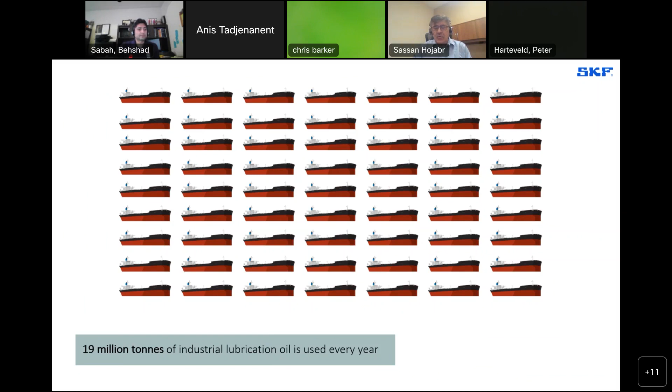However, the way people have looked at traditional lubrication and industrial lubricants in particular, we want to change the mindset and look at this oil as an asset as opposed to a disposable commodity.

I'm showing here, for example, a typical oil cycle, starting from the original state at the higher oil quality, and then it goes to whatever process it is, and then it degrades over time, and then the oil basically is being disposed of into new oil, and then we do this multiple disposal and use in the system.

But a couple of issues with that. One is that obviously we are in the era where everybody is looking for sustainability. As you know, COP27 is ongoing, and everybody is trying to find a way to contribute in any measures that they can. So this is obviously not a sustainable way of doing this.

The other thing is the quality of the oil as it degrades is also going to change the performance of the processing equipment that you use that lubricant for. And so obviously there's a cost involved with all that. So ideally, one wants to be able to continuously use the oil in this original state, if possible.

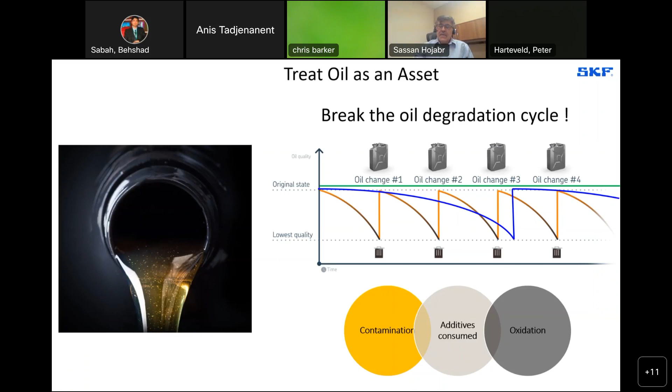All right, so what SKF has done over the past number of years is look at this technology called DST, or double separation technology. This is a company that we actually acquired a number of years ago, as I mentioned, and this is an oil reconditioning unit that runs in its SKF factory.

As you see, it's a fairly large piece of equipment, and this is installed in a very large oil reservoir. And here it's showing that for every cubic meter of oil that is being regenerated, there is over 3 tons of CO2 being conserved.

And we have, as I said, a number of these in our facilities, both this large one, and then we have the smaller version called small integrated, as well as what's called the standalone system, which can be operated at the side, and you can bring the oil and recondition there.

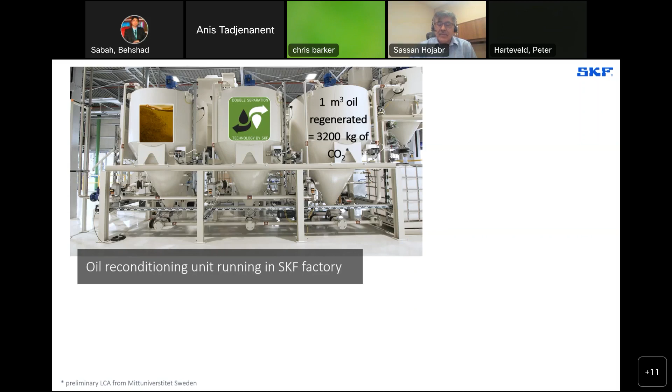We were also very excited to essentially launch a compact version of this, which we call RecondOil box. I'm going to go through some of the mechanics, but basically the idea was to bring that technology into a compact form that can be adopted by customers for many operations.

And it comes in many different forms, but this actually has even higher equivalency of CO2 reduction per cubic meter of oil that is run through this unit.

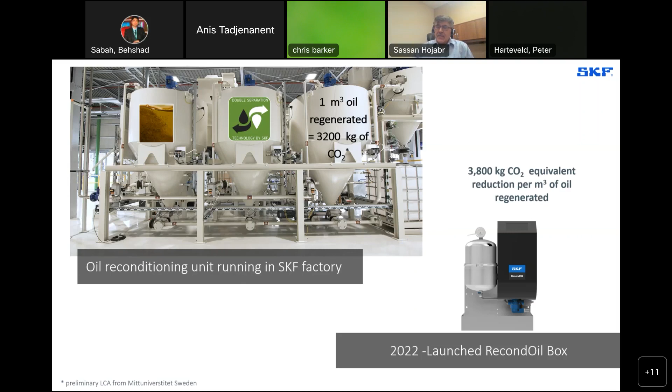So again, the potential areas of this circular use of oil, or extended use of oil, would be total cost and oil cost reduction. That's very obvious to everyone, especially with this increased cost of lubrication, and everybody suffers from that, as we all know.

Performance improvement, as I said, if the machinery can run with a lubricant which is as close as new, then it's going to perform much better in whatever application, being hydraulics or otherwise. And this sustainability angle and the reduced emissions can contribute, even though small, to each company's target goals in terms of sustainability.

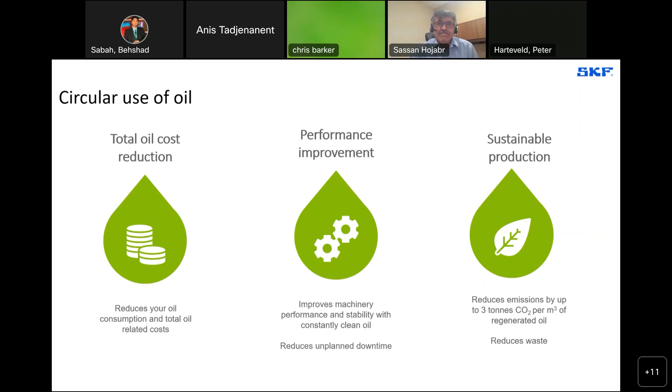So let's move into what we have for the talk today in terms of content. I'm going to talk more about describing what the RecondOil and this double separation technology consists of.

And then we're going to look at the tribological verifications of that, because we have to make sure that the oil treated this way has no negative impact, and hopefully positively affects what we see in terms of friction, wear, and other aspects.

And then we'll give you some examples that have been done in the facility I mentioned in Netherlands by Arnaud, and then we're going to look ahead at some of the things we have already done and some things that are ongoing and coming as we go through the remainder of this year and forward. As I mentioned, we have another talk planned for the next STLE.

Okay, so let's focus on this reconditioned oil, the double separation technology, and explain a bit more for those who are not familiar with the concept.

So this is called double separation technology because it has two combinations of a chemical and mechanical process. What we have here is a patented technology, which we call a chemical booster, for lack of a better description.

This is added to the oil. It's very attractive to many of the contaminants that are present in the oil. But the first thing we have to do is mix this booster with the oil.

So there is a process of mixing this in, and a lot of the technology we have is around proper droplet size, and all that has to be done properly. Once that's done, then the next step is that, once it's mixed in, it's going to start attracting all the contaminants within the oil.

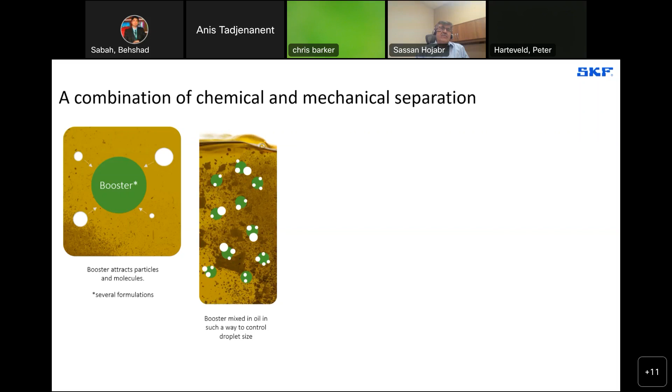These contaminants come in different sizes, and once they agglomerate onto these particles, attracted to them, the whole system starts agglomerating, and you get these bigger booster droplets coalescing together with the contaminants. Then you can settle or separate them in different ways.

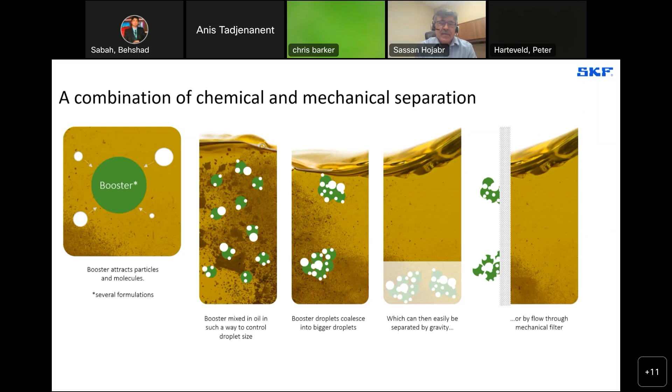And you would have this top phase, which has a very low contaminant level, and that's still going to go through a separate filtration to remove the last remaining contaminants. But what I'm showing in this last part is also the RecondOil box technology, in which we included this booster and impregnated the filter, so we can achieve this double separation technology with a filtration system, which is very convenient in that sense.

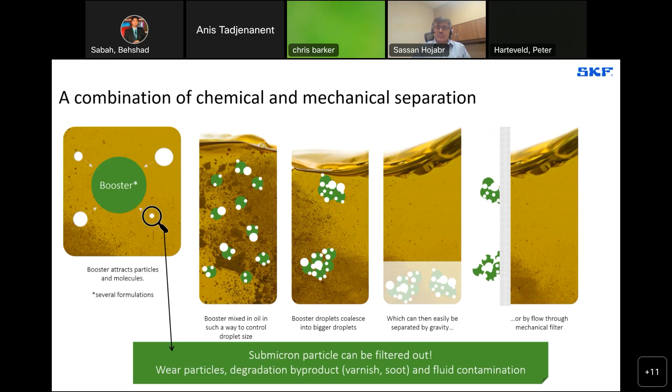In terms of the type of particles that we can remove, they could be from anything: wear particles that come from the process, like iron or other metal particles, degradation products that come from the oil itself, which demonstrate themselves in terms of varnish or soot, and fluid contaminations like water and others, which are all very attracted to this booster because of its chemical composition.

One thing we wanted to emphasize in terms of the effectiveness of this system versus other potential systems is that it can go into really submicron and nano particle removal from the oil. There's a statistical distribution of particles within any system, and in oil as well, where 80% of the particles would be in the submicron region. The issue with that is, in terms of the surface to volume ratio, there's much more surface area for these nanoparticles and submicron particles, even though they're small.

Chemistry, as you know, is really driven by the surface, and so when you have a lot of surface area from these contaminants within the oil system, that can really degrade the oil at a much accelerated rate. That's where we like to bring the benefits of DST, which can really tackle that and remove them from the oil.

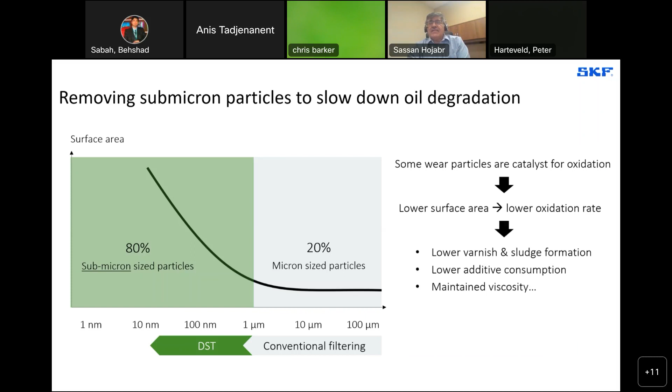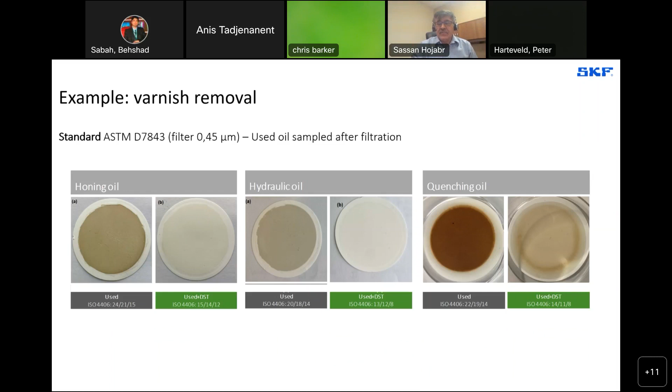But interestingly, since we're talking about nanoparticles and also these soluble varnishes, the patch size is 0.45 microns. So anything smaller than that, you would not see in a typical patch test, the standard ASTM test.

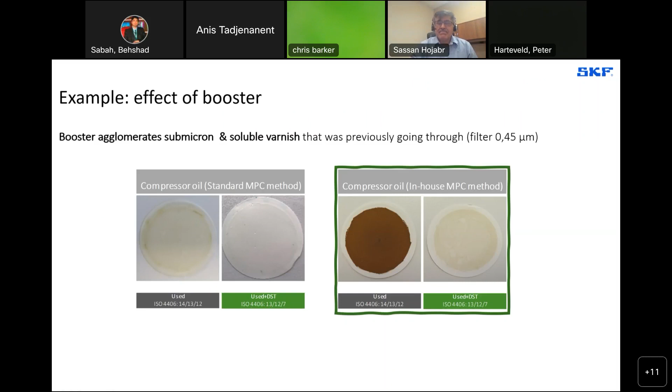Another study that was done looked at what effect DST has on the thermal stability of the oil. This is a good study done on a high viscosity 320 centistoke oil, and we deliberately added submicron iron oxide particles to the system.

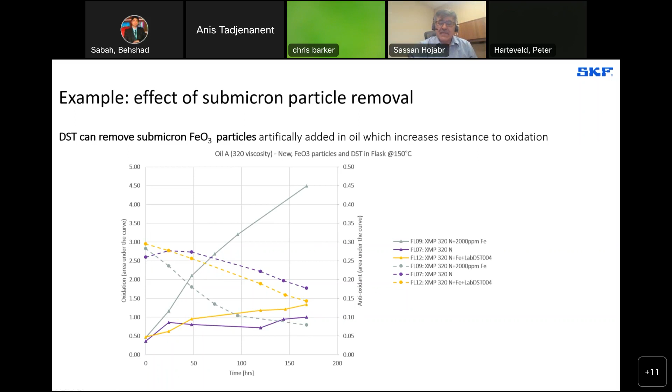But when this oil was treated before going to the aging, with the DST process, the picture changes. This yellow shows that we actually pretty much bring it back to the state of what the new oil was, both in terms of thermal stability and in terms of oxidation or antioxidant level. So again, it demonstrates that these submicron particles can be treated in the oil with this DST process, and removal of them would help the health of the oil.

All right, so let's now move into the tribology part of the discussion, because this is the forum that is for it, and it's very important that once we do this treatment, that we are not negatively affecting the performance of the oil, because at the end of the day those properties are good only if the oil can perform in the real application.

Areas that we have been focusing on in terms of this DST technology: metalworking is one of them, as I mentioned, used in our own plants, and I'll have examples of that again. We also have SKF making a lot of bearings and things like honing that can use this technology. Hydraulics is another focus of ours in terms of oil systems.

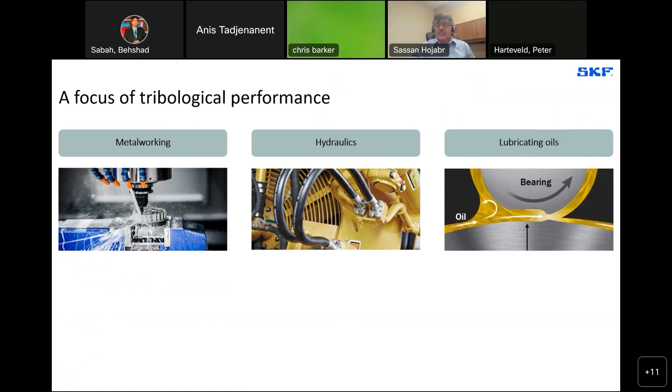For hydraulics, maybe particle count is not as much of an issue, rather the varnish can be very detrimental to the health of machines like injection molding and others. And the one that is obviously very close to SKF's heart is lubricating oil and its use in bearings and so forth. That's where we're working, getting more data, and we have examples in this talk. We're doing more work to get the data we need to show the performance there. So that's kind of our challenge as we go forward.

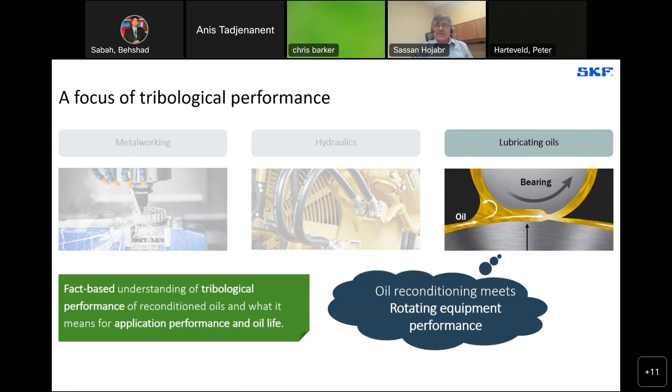All right, so let's move to setting up how we do this tribology verification.

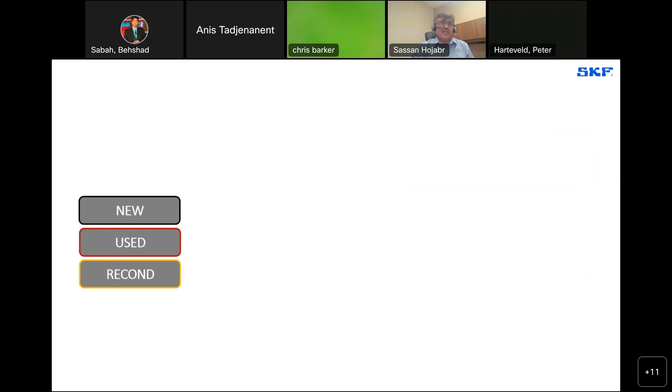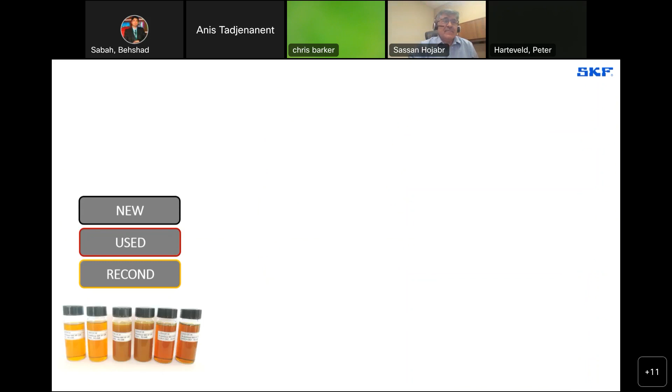So we have the three types of oil, as we mentioned: new, used, and this reconditioned, which is basically DST treated. We can see at times this visual improvement in terms of color, but not always. Color is one indicator, but really one needs a much better way of characterizing the oil.

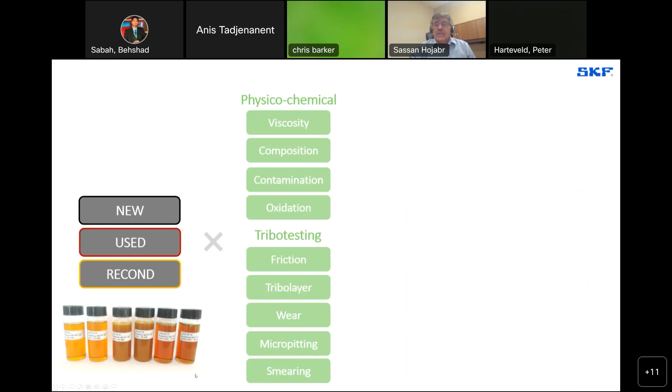So we do a whole set of tests in terms of the physical chemistry of the oil, the viscosity being the indicator of the oil being suitable for the application. We look at the composition of the oil by various methods like XRF and ICP to make sure of the additive content, although it's not 100%, because we don't necessarily always know what the additive package is that is used.

For contamination, we're looking at particle counts, iron particles, the PQ, the patch test, as I mentioned, and also measuring water content. Oxidation is measured in various ways, by FTIR, total acid number, the RULER number, RBOT, and so on. So we're looking at all that in terms of characterizing the oil, basically as it was and after being treated.

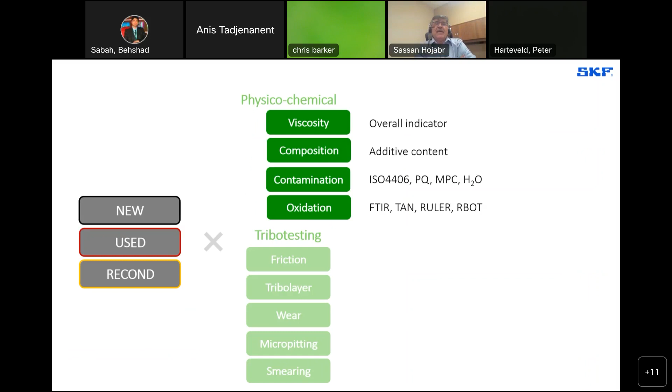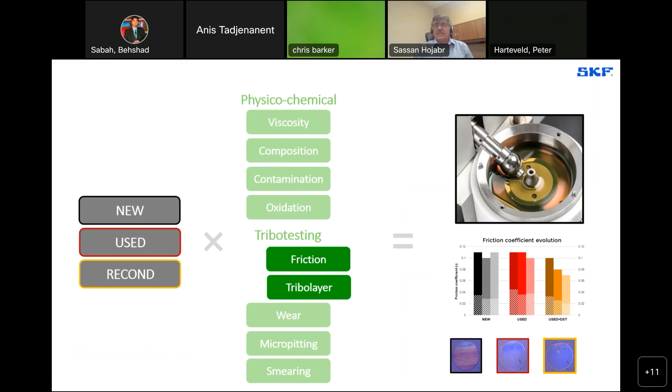In terms of tribo testing, these are again done at our facility in the Netherlands. The typical MTM ball-on-disc test measures coefficient of friction, and there's also measurement via camera to view the tribofilm layer that is formed.

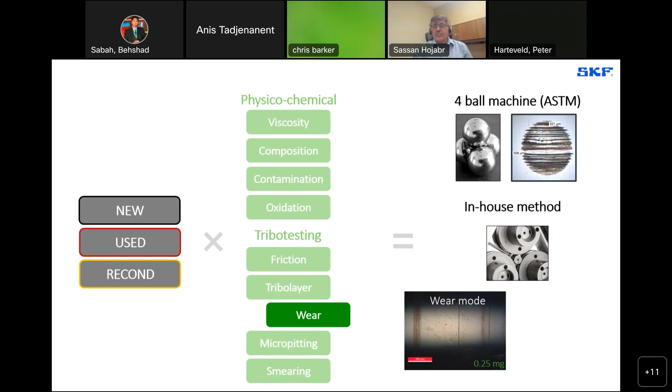For wear, again the standard 4-ball machine is used, which has its own limitations. We also have in-house methods which are better controlled that way, and we look at the wear mode, both in terms of micro pitting and macro pitting, and we can characterize them at different levels: good, medium, and severe micro pitting cases.

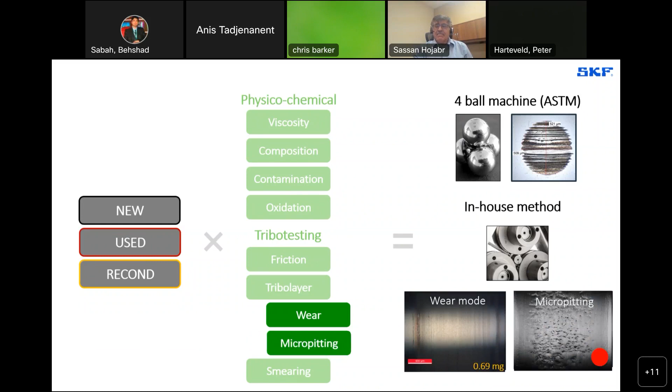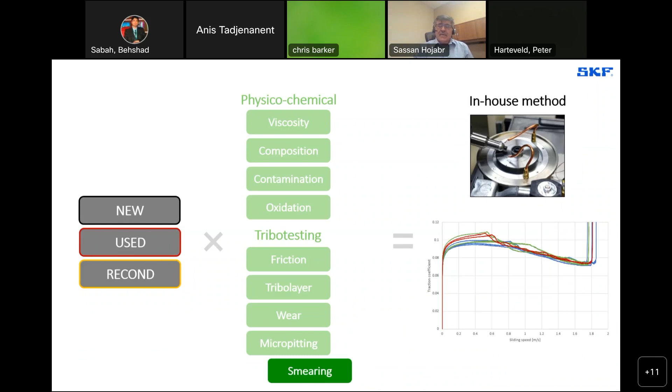We also have a smearing test where we look at the traction coefficient, where you basically get welding that results in a very high increase in the traction coefficient. This shows that all samples—new, used, and reconditioned—had similar behavior. All this information gives us a bigger picture in terms of what we can do for real application testing, like FZG or FE8 tests, which require a lot of money and time. Having these tests done gives us a good indication of whether the process is suitable for this type of application testing.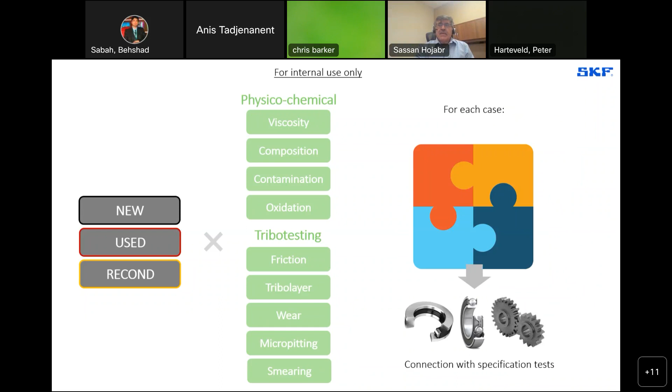Let's move on to some examples of the studies that have been done. The first one is a compressor oil from an air compressor with a reservoir of 72 liters at 85 degrees C. In this case, the oil was taken after approximately 1,000 hours, and the normal drain interval is about 8,000 hours, so it's in the early stages of oil use.

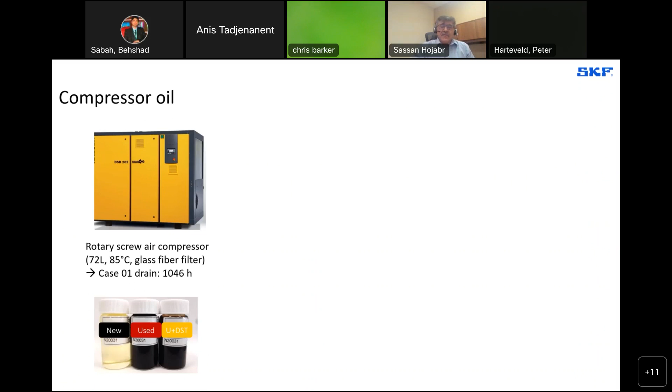You can already see it's quite dark from use, and after DST treatment, the color really didn't change much. So as I mentioned, color isn't the entire story.

One thing significant to look at was the particle counts, which also didn't change much. But the oxidation indicators were all very much improved, looking at the FTIR, comparing the used oil and after treatment.

The RBOT result came back very similar to the new oil. The MPC rating was good, but got much better once treated. The same goes for total acid number—it decreased after treatment. These are all very good indicators of the reduction in oxidation byproducts in the oil that was tested.

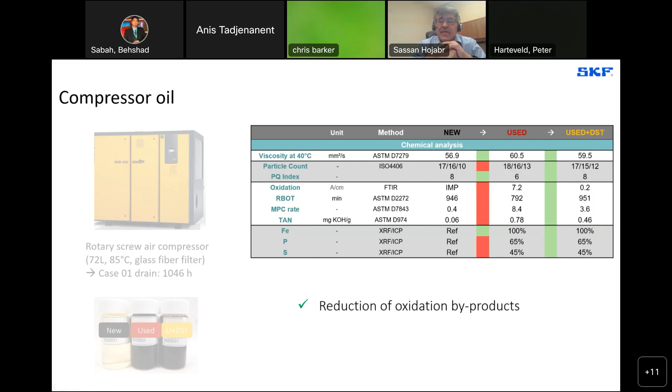Even with the additives, some are consumed and we are not replenishing them, since this was already processed. So the concept we like to propose to people is that it would be great to have this reconditioning done from the time the oil is new, so you can keep everything at a high level without really degrading them.

For friction performance, this shows different slide-to-roll ratios at different temperatures. All three performed similarly at 10% and 50% across those three temperatures, which again indicates that the DST process hasn't really changed that, which is good.

We saw some improvement in wear performance, shown here with the 4-ball and the in-house wear test I mentioned. In both cases you see some improvement in wear performance, despite the fact that phosphorus was lower in the used and used-plus-DST samples.

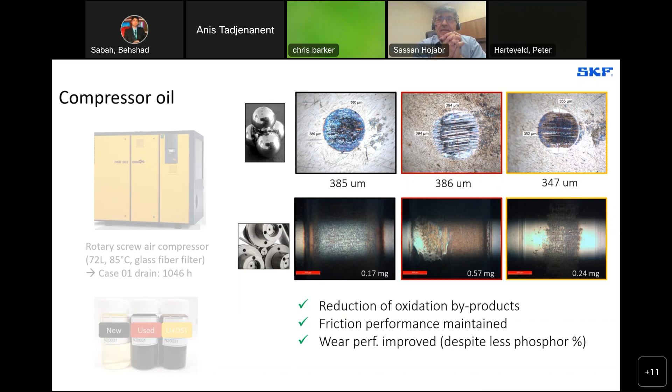The smearing effect was also pretty consistent with this—this is also measured in-house. I forgot to mention that. All three were tested at different temperatures and performed similarly again.

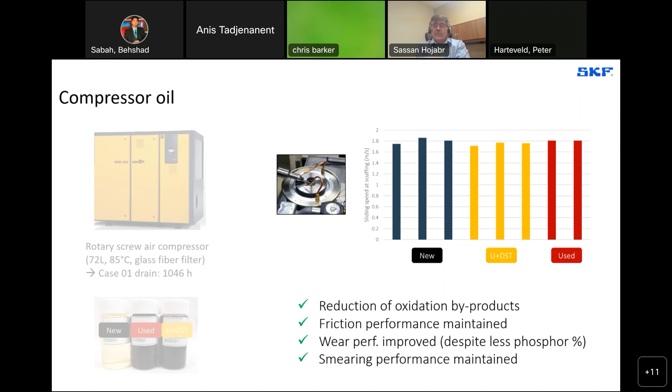All right, so here's another example, and I am going over time, but hopefully it's okay. We have it up to 11, so go ahead. Okay, so I am taking most of the time that was allowed.

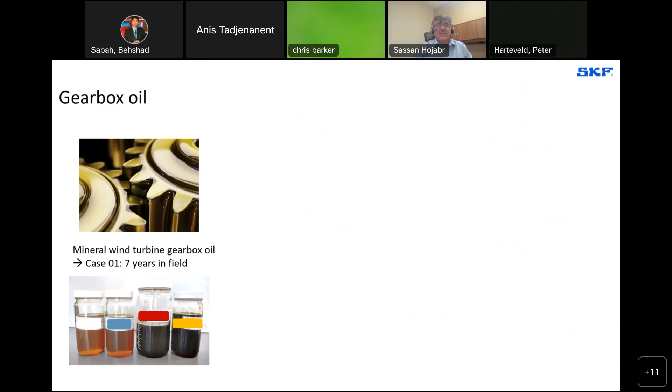One interesting thing was that viscosity was essentially restored—the used oil had high viscosity, and once treated, the viscosity decreased. There's some improvement in particle counts. The elemental analysis again shows we are not topping up these oils, so they are as they are.

In terms of friction, there wasn't really much difference between the MTM results before and after. In terms of wear, we did see some increase in wear with the used-plus-DST sample.

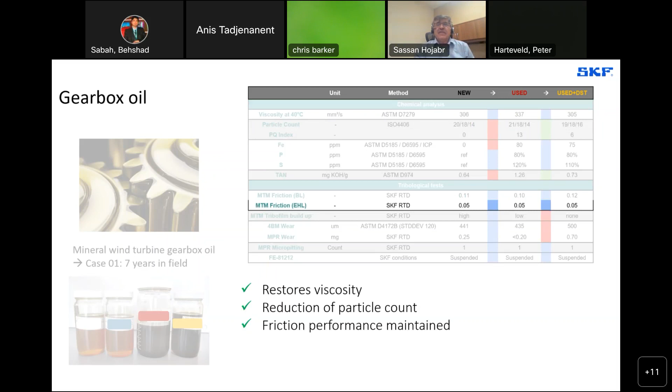However, friction performance was maintained. This was something we had concern about regarding wear, but then we did the full bearing test mentioned here, and it determined that they all performed satisfactorily. So that further test did not raise any worrying indicator regarding the wear.

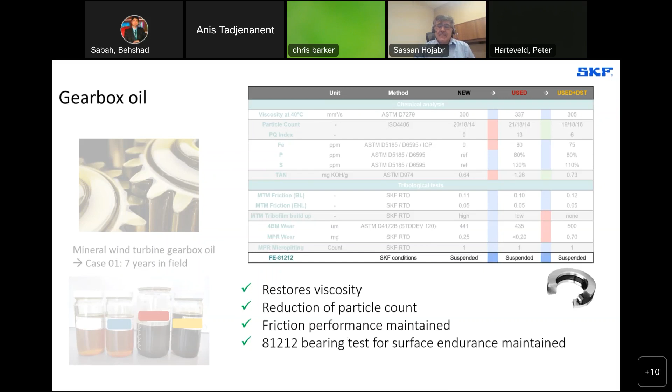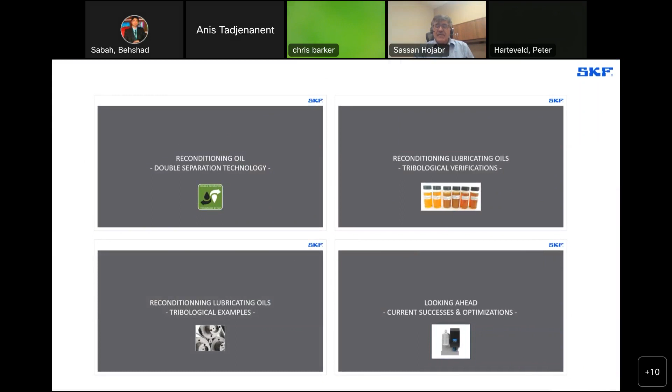So again, that was positive to see. All right, with that, let's move to the last part of our talk today, in terms of where we are in some current successes in real life and planning regarding this more compact form of the RecondOil DST technology, with this RecondOil box.

So the first example is a large DST installation running in one of our manufacturing facilities, in Italy, Cassino I believe. It's using a honing oil used in bearing production, and this is showing the gravimetric test for residue on the filter. They have a dirty tank and a clean tank, and this was how it was in terms of milligrams, per liter or per 100 mil typically.

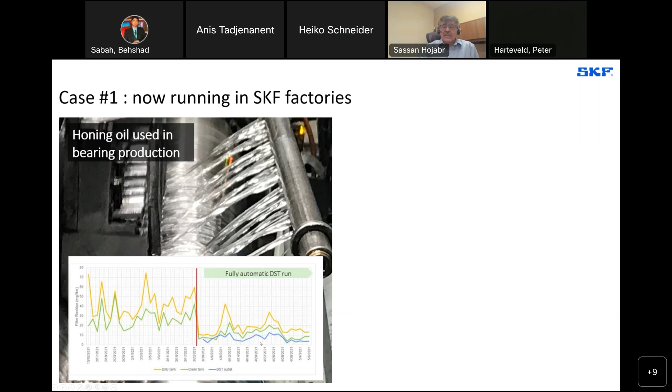So it was pretty widespread, and it was high. Then they installed the DST unit, as shown here in red, for both the dirty tank and the clean tank, and right after the DST they really decreased, which was very good for the production manager and plant manager to see. These are actual metrics that they observed, in terms of those three items I showed before.

For oil consumption, they reduced the oil consumption by 55 cubic meters, which translates into a CO2 saving of around 150 tons. And they had 40% scrap reduction for the bearing parts that they produce.

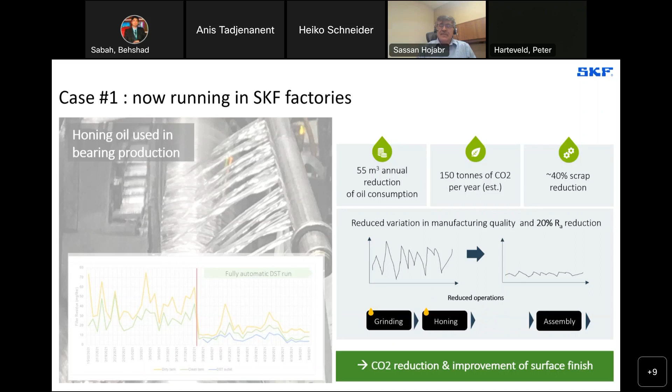These are other metrics they look at, in terms of the variation in the quality of the surface of the bearing. They managed to bring that to a much more manageable and controlled state, to the point that in their process of grinding, honing, washing and assembly, because of this data, they actually managed to eliminate the washing step, which was a very good outcome in terms of cost saving, ease of operation, and other things.

Here I'm showing more recent studies that we have done, and as I mentioned, we are doing much more — we have another paper coming on that. So these are the cases that we looked at.

This is a third party facility that ran a very aggressive hydraulic oil under test conditions, and these conditions were very severe: running this unit at 200 kilometers at 80 degrees C, then changing that to 60 kilometers at 110 degrees C, with very high pressure above 200 bars, looking for leakage, friction and wear.

What they did was run three test cycles as I'm describing here, and then the oil afterward was handled two different ways. One batch went as-is to test number 4, and the other piece, after test 3, went through a DST cleanup process for this hydraulic oil, and was then able to run for at least two more cycles.

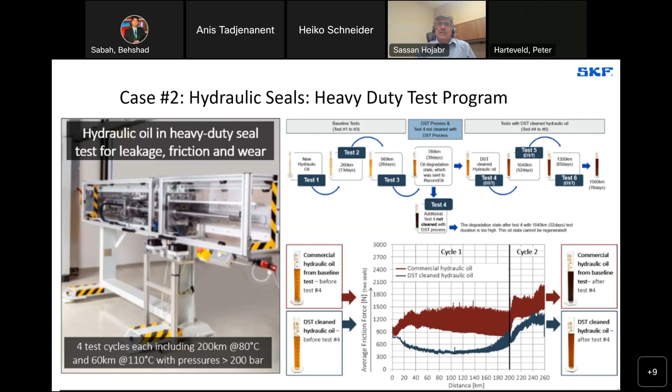Okay, so this is just a bit to show you what this new DST version is. It's basically for gearbox oil, would be the same as in a kidney loop, and it just connects to the oil reservoir, and it would run at whatever flow rates that is being set up at, and it's very easy to use.

And the functions are mentioned here. It's similar to the large units that I described. Essentially, the idea is to do this nano filtration or submicron filtration, removal of varnish,

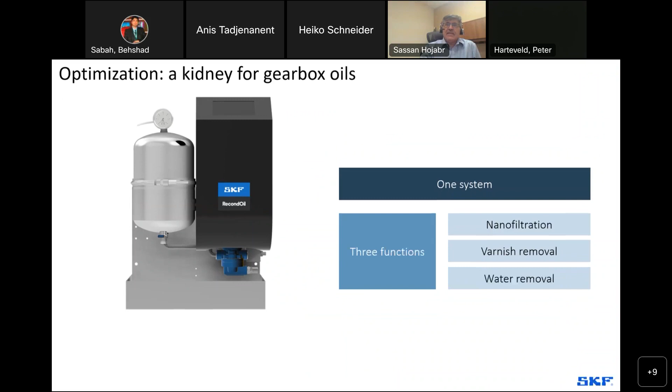and capability to remove some water as well for the system. Although if you have a very high water content, we suggest that you use a kind of dewatering system prior to use that. And there are 2 types of filter that are available and used interchangeably afterwards, so they're very easy to go.

Typically we start with just a mechanical filter, depth filter, very effective, as it's shown in terms of the varnish capability. It still can go submicron, but not as low as this DST activated filter.

It can then do insoluble varnish versus the soluble varnish, as I mentioned, as I showed to you with that patch test. And the water removal is also, again, more effective for depth filter.

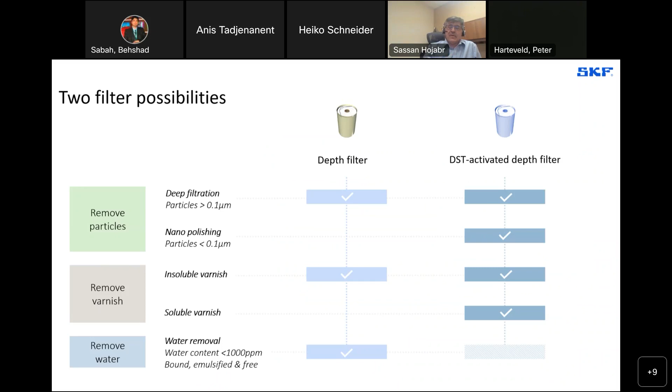With a DST activated filter, we don't want high water in the system. Really, you want to tackle the dissolved water using the DST activated filter, because water has affinity for the booster itself and can bind those sites that you'd like to have for contaminants and varnish removal.

We have many of these DST RecondOil boxes installed in different places, both at our own sites. Right now, actually, we're running one in our own facility in SKF here in Dorval site near Montreal for a customer test.

But we have many cases that are coming. You can go to our website for SKF RecondOil, and you can get examples of these applications that have been done, and we're just adding to that information on a frequent basis.

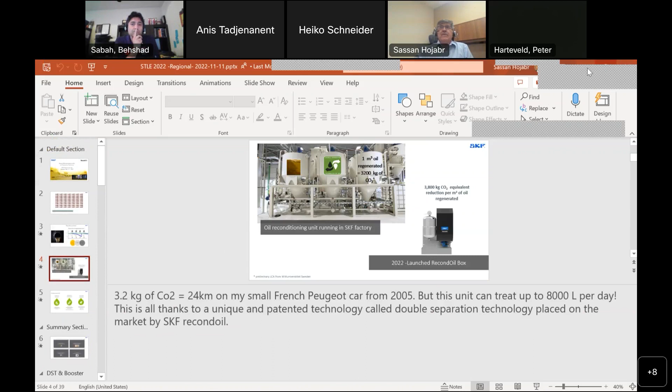When you say large system versus small system, what's the threshold? The threshold is based on the liters per day they can operate. For example, the large unit I was showing was about 8,000 liters per day. For the smaller units, we are actually improving - it used to be a few hundred, like 800 liters per day, but we improved that to more around 2,000. So let's say about 2 to 3,000 liters per day for the smaller integrated units, and over 8 to 10,000 liters per day for the large units.

We see only a gray box - if you are sharing something on your screen, we don't see that. Oh no, sorry, no, I'm not sharing.

Okay, so the next question is: I have read about EPT clean oil technology - is there a huge difference between SKF RecondOil technology and EPT?

EPT is using a resin exchange system, which is a more traditional way of removing varnish. Ours is different in chemistry, going down to submicron and nanoparticles. I won't say something negative about their system, we'd have to look at it side by side, but in terms of what we've seen, our system's submicron particle and varnish removal is very effective. They have resin exchange, which is different from what we do, not quite the same mechanism.